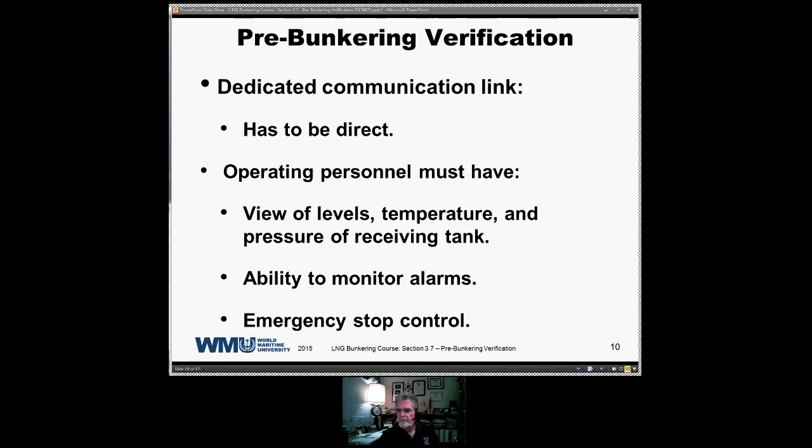...the operation down should any type of anomaly occur that puts the system in a potentially dangerous area. The dedicated communications link is usually a handy-talkie, a walkie-talkie, UHF, and it is required that they be intrinsically safe. An intrinsically safe item has special seals in it so that you're not going to get any vapors inside and run the risk of having a source of ignition. Even though you're talking very low powers, any source of ignition has to be eliminated. So the radios are made intrinsically safe, so it's not possible for any flammable vapor to get into the actual inner workings of your radio.

Emergency signals have to be clearly established and understood. Vessels have their emergency signals. Terminals have emergency signals. These signals should be discussed and clearly understood by the parties prior to any... Also, a vessel is going to have contingency plans. You're required to have this by the International Safety Management Code. Terminals are required to have a contingency plan. So it's important that all parties know what the other party is going to do in the event of an emergency.

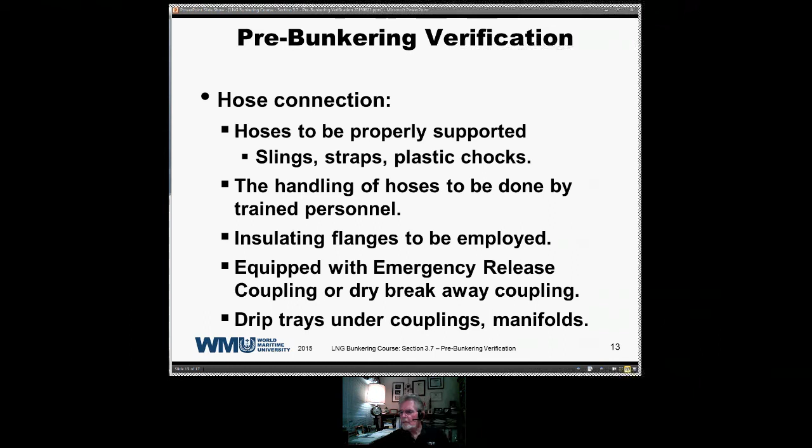We're going to go along here now. Insulating flanges, we got the drip trays, okay. Once all of these inspections are conducted, the declaration of inspection will be executed by the PIC, the person in charge from the receiving vessel or from the delivery vessel, and since it's bunkers, the PIC on board the receiving vessel will usually be the chief engineer. The declaration of inspection is also, the declaration of safety is also executed as above by the parties.

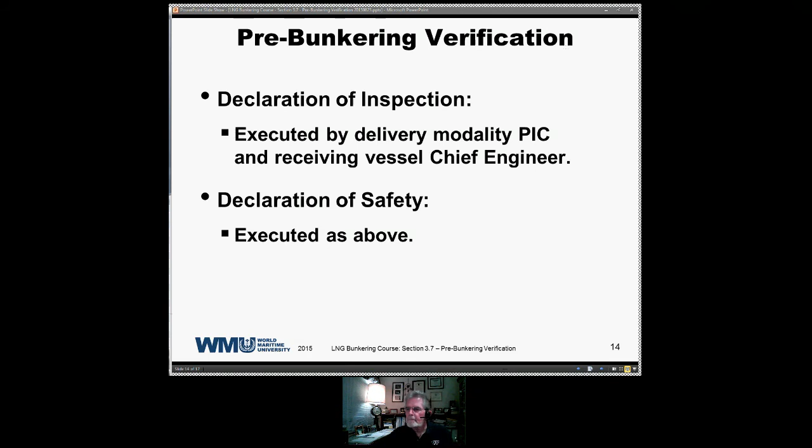The pre-bunkering verification is the first step to assure all operations are followed as prescribed so that there's no deviations and that they're monitored at all times. Once again, this can become a routine operation, and you really don't want to allow it to become routine. It should be approached by the parties involved with the attitude that this is the first time it's ever been done. So you're going to very, very closely take a look at the procedures as they're outlined and follow them step by step. And if these procedures are followed step by step, close attention paid to them, we're going to go through bunkering operations without any incident.

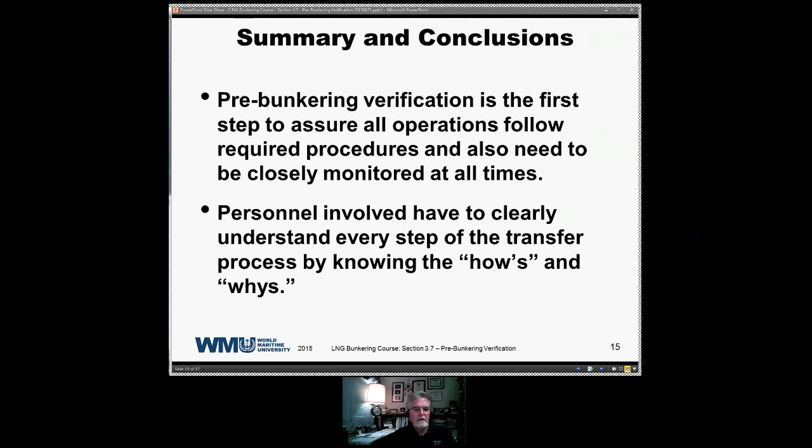The personnel should have a clear understanding of every step of the transfer process, knowing how to do things and why we're doing things. You just don't automatically assume something's on a checklist and it's just done. We have to do this because it's on a checklist. No, we're doing it because there's a reason. Everything on that checklist is there for a reason. And it's important that the operating person know why they're doing it. Again, communications equipment's tested.

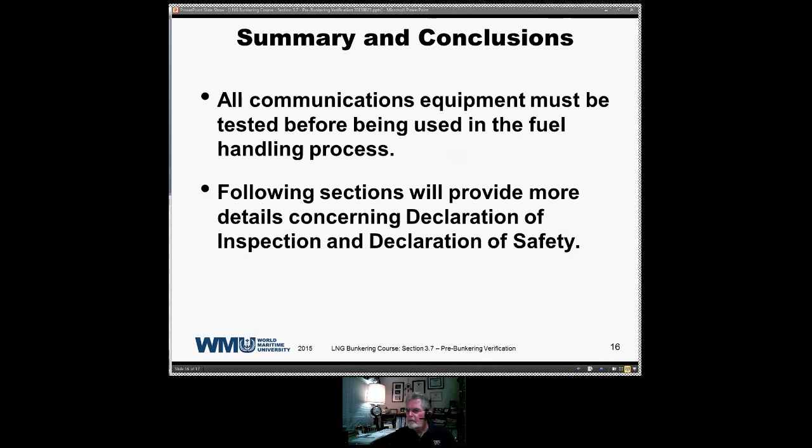And what we'll do now is I believe we're going to actually take a look at a declaration of inspection. Okay, all of this is fundamental, can often be taken for granted, but we always have to follow the saying: we're going to trust you, but we're also going to verify everything step by step. Okay, that takes care of that section. Move on to the next one, which is actually, I believe, the declaration of inspection. Okay, do we have any questions or thoughts on this particular portion of the course? All right, let me pull up our next PPT.

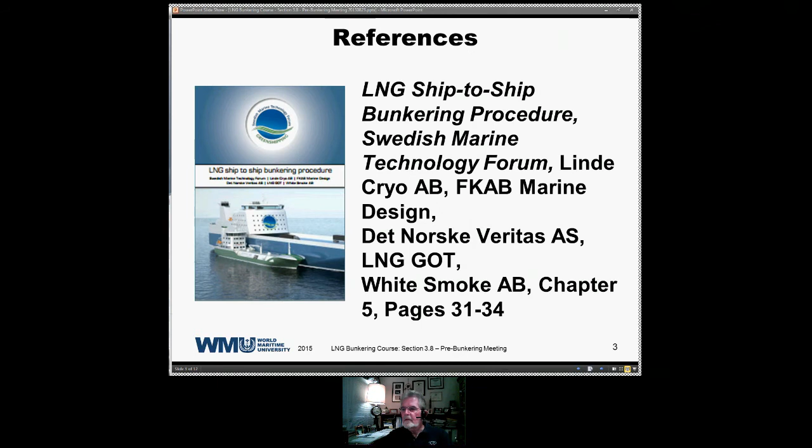So we're going to take a look at the pre-transfer checklist items and discussion items, and among some of the things that we talked about earlier, we're also going to take a look at the current and future weather conditions. We know what the weather is when the ship comes alongside, but we also want to know what's going to happen over the next several hours. You don't want to get caught in a sudden storm. Let's just say there's a series of violent thunderstorms that are going to be moving through an area, such as overseas. In Indonesia, we used to have what were called sumatras. It was a very strong wind that would suddenly come up without warning. So you wanted to be aware of what the weather is going to be.

Again, we're going to make sure the receiving ship is safely berthed. We're going to make sure that the delivery ship, if it's a barge or a small LNG ship, is also safely berthed. The mooring plan is something that's exchanged between the receiver and the deliverer prior to any operation, so that everybody knows where mooring lines are going to be placed. Both parties can take a look at the plan to make sure that the vessels are going to be safely secured to each other. Again, the fenders are properly positioned and properly secured, and the communications language has been agreed upon.

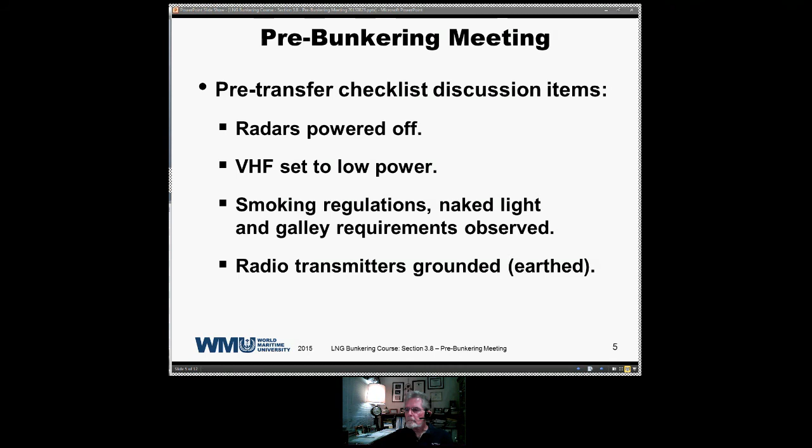We're going to agree upon emergency signals and shutdown procedures. Firefighting equipment, again, tested and ready for use, and that's all parties involved. And that the navigational bunker signals, which are required by international regulations, are properly displayed. And again, an overlap, the bunkering hoses are inspected and tested.

If there's any bunker manifold that's not being used, we have to be certain that there's a blind flange installed on that manifold. A blind flange is a full face flange, full face cover, no openings or holes in it, and that has to be properly secured to any manifolds that are not in use. The alignment of the valves in your bunkering system have to be correctly positioned and checked prior to the transfer and during the transfer.

Once gauging is completed, the quantity to be transferred is agreed upon. And during this process also, we're going to agree upon what the maximum pumping rate is going to be. For the bunkering operation, we're not talking huge quantities of LNG to be transferred. One of the examples yesterday was the ferry boat where the capacity of the tank was 65 cubic meters. So the maximum pump rate in a bunker transfer situation like that is going to be relatively low.

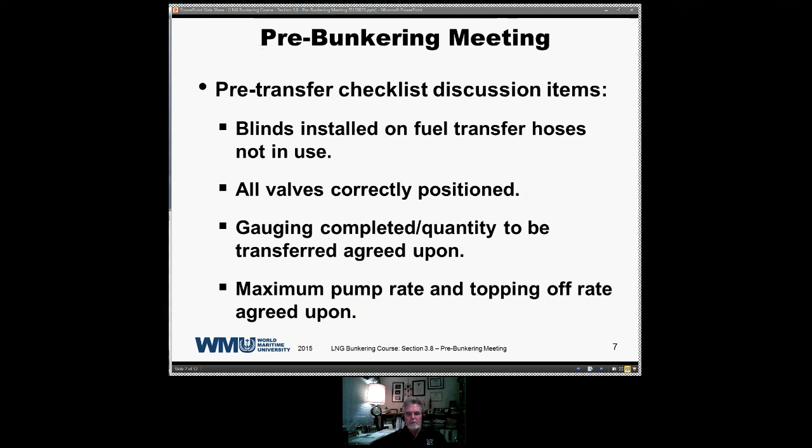A topping off rate: as you approach your tanks being filled, you reduce the transfer rate. You don't want to be pumping at maximum rate as you're coming up to the highest level inside of the tank. There's a lot of turbulence and movement of the liquid within the tank, and you don't want to run the risk of having an emergency shutdown because liquid has splashed up, say, to a high-level sensor or something like that. So as you approach the full level of the tank, you reduce the transfer rate and you bring that level up to full capacity at a very, very slow rate. And that rate you're going to agree with your deliverer prior to actual transfer.

The bunker station is always going to be manned by trained personnel. You're not going to leave the second cook in charge of bunkering. Not that I'm picking on cooks, just that the people who are involved in the bunkering operation have to be fully trained. They have to have a knowledge of liquefied natural gas, its properties, characteristics, and everything that you are being exposed to in this course. Personnel have to have a knowledge of the location of the emergency stops and how to properly use them.

Again, we're going to look at drip trays positioned below liquid manifolds and connections, and a vapor return connection is going to be made. This is not necessarily true in all cases. It's going to depend upon the delivery modality and the type of tank that you have on board your receiving vessel. So in some cases, you will have vapor return. Other cases, there won't be vapor return. And this is something that will be determined again by the type of vessel.

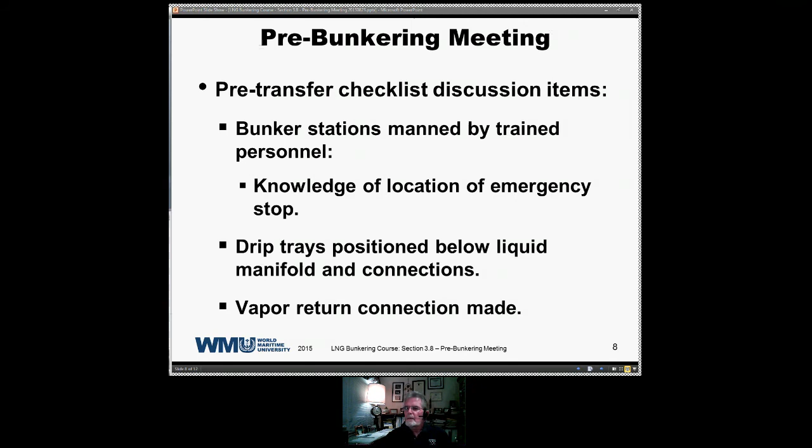If by any chance your marine gas oil or marine diesel oil is also going to be transferred, you can have what are called SIMOPS, simultaneous operations. SIMOPS includes cargo operations while LNG bunkers are being transferred, and it also can involve the transfer of other types of fuels. As I said, all of these diesel engines in vessels nowadays have the ability to dual fire. Some of them are tri-fired. You can fire 3 different types of fuels.

So in some cases, you will be also transferring your marine diesel oil, your low sulfur diesel, or perhaps a higher sulfur content fuel for use when the vessels are outside of your emission control areas. So you can have these operations taking place simultaneously. If you're transferring the marine gas oil or marine diesel oil, it's important that the deck scuppers are plugged. Your deck scuppers, again, for non-marine people, these are the deck drains. It's a drain hole that's located in various areas throughout the deck.

And when you're transferring an oil product, you have to have these things plugged so that if there is a spill, you don't get any oil into the water, because these drains, they drain directly over to the side; they go down in an internal tank, and eventually they go over the side of the ship directly into the sea. Your sea and overboard discharge valves have to be closed, lashed, tested, and checked, made sure that they are lashed. Any of these overboards that's not in use.

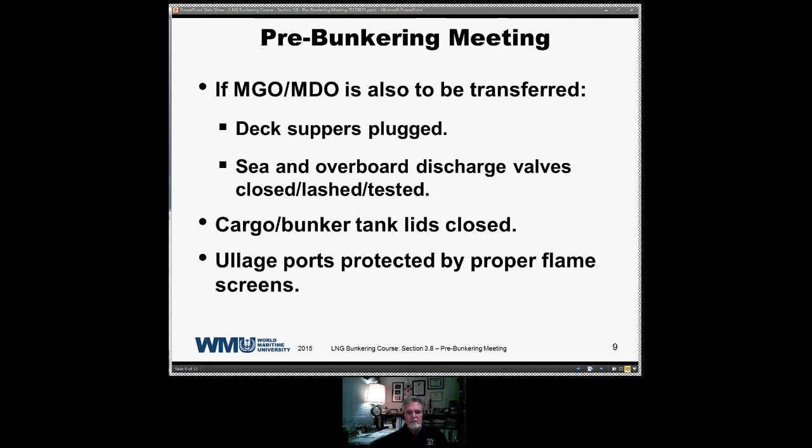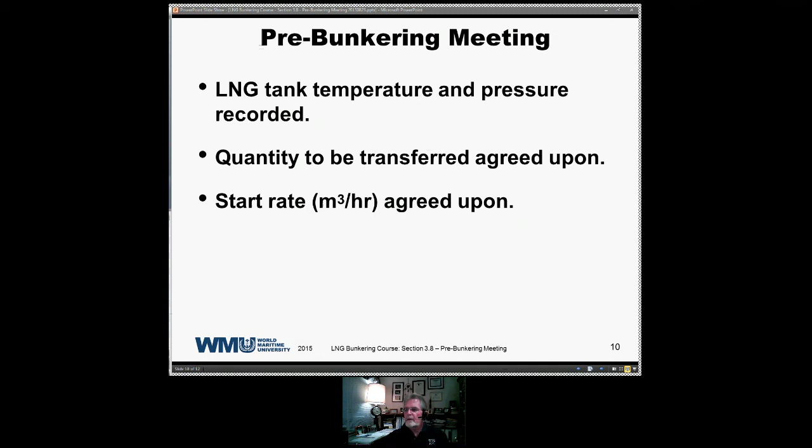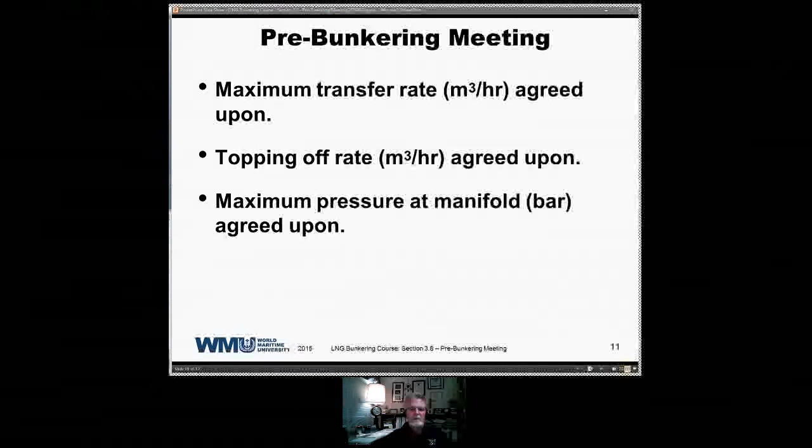Again, the recording of temperatures and pressures, quantity transferred to be agreed upon, and the starting rate; also maximum transfer rate is agreed upon, topping off rate, and maximum pressure at the manifold is agreed. All of these items are of critical importance, have to be agreed upon by both parties. Just don't willy-nilly start an operation and say, well, let's see where we're going to wind up with pressure at the manifold. No, we have to know what it's going to be beforehand, and then it has to be monitored during the operation to make sure that we do what we said we are going to do.

The pre-bunkering meeting process is critical to assure that nothing can or will go wrong. And believe me, as best you try, sometimes things do go wrong, even though you agree. So this isn't a guarantee, but it does prevent most cases of disagreement or issue. Some of the items to be discussed are obvious, but the key is that all parties at the pre-bunkering meeting clearly understand the process. If there's any doubt or uncertainty, ask questions. Again, we're going to trust, but we're going to verify at all stages of the operation.

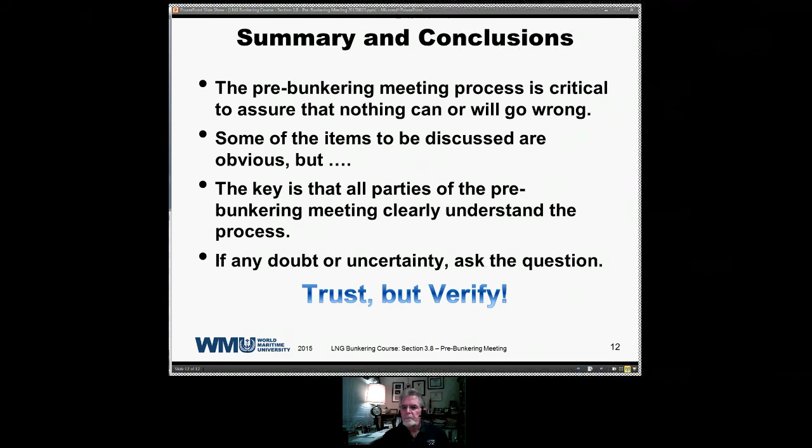Okay. Some big differences in discussion about the LNG. Okay, excellent question, and you're absolutely right, Simon. Simon has asked me, during bunkering of heavy fuel oil, often big differences are discovered, and there often is a discussion about the amount of cargo. What about LNG? Outstanding question. I appreciate that one. Bunkering operations are notorious, absolutely notorious for differences, and that's why we were talking yesterday about this custody transfer gauging system on board the LNG carrier, and also the gauging of the delivery vessel.

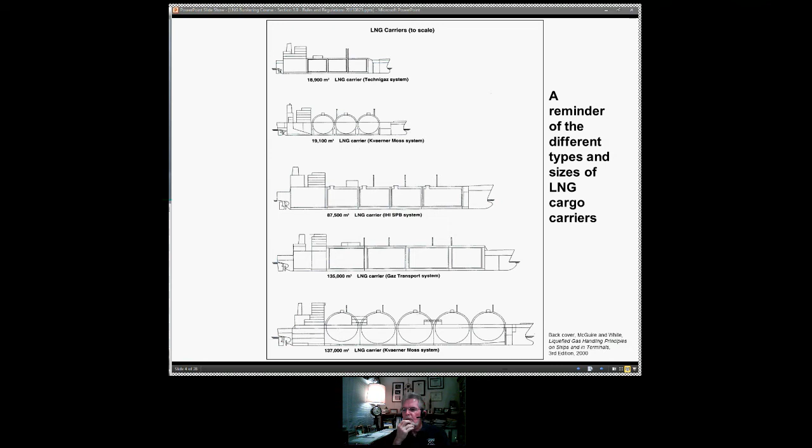Flag state maintains a register. We're going to go through this fairly quickly because it's basically just for information purposes. They assume jurisdiction under its national law. National and international laws ensure the safety of the vessel. Vessel surveys are conducted and ensure qualifications. This is the responsibility of the flag.

Hopefully, under IMO, the playing field has been evened out greatly over the last 30 years. So you don't have these vast differences that we had years ago between registries. Ship operators, some of them maybe not as scrupulous as others, would all go to a flag state that maybe wasn't as attentive to safety regulations and whatnot.

With the introduction primarily of the safety management code, and with the responsibility of the maintenance and operation of ships shared by the management people, we have seen a lot of these differences greatly reduced. Most of your flag states are very, very well respected in society. This perhaps wasn't as much the case 30 years ago.

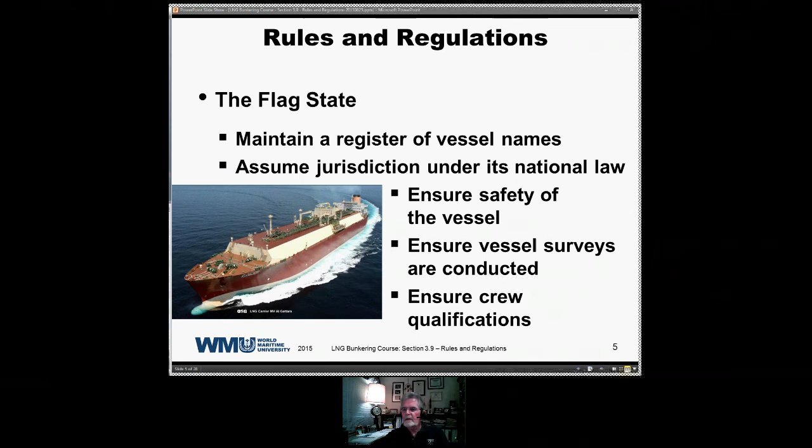Various rulemaking bodies, such as the IMO, the International Maritime Organization, and under their auspices, the International Gas Code. And the International Gas Code would be responsible for the bunker barges and bunker ships. The IMO also has the IGF Code for ships fueled by LNG, and that's going to have the rules and regulations for the construction of the receiving ship only.

The vessel that's going to be burning LNG as a fuel, those rules will be established by the IGF. Again, it's for construction only; the actual operation is another issue. You have the society, SIGTTO, and OCIMF. These are two private organizations.

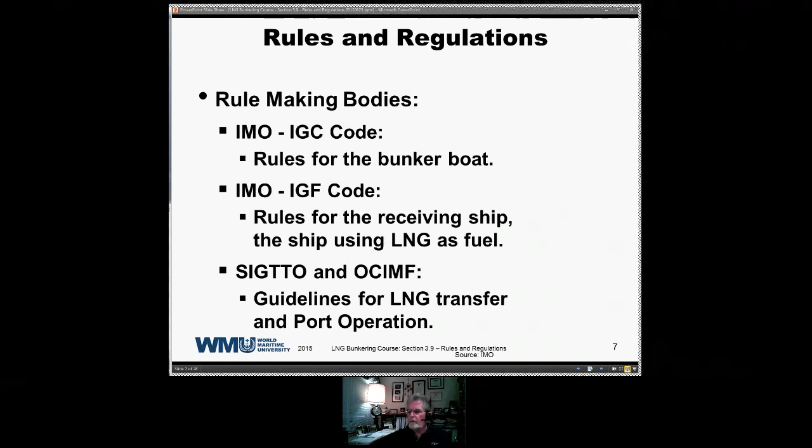We also have various port regulations, as we mentioned yesterday. We have Antwerp, Rotterdam, Singapore. All of these ports are going to have their own rules and regulations, and in most cases, those regulations are consistent with international rules, but because they do have the authority, they can establish rules that might be unique to these ports. So it's important that the ship operators and the ship staff have copies of the rules of the various ports they're going to be visiting. This way, you're not caught short.

Then you have various onshore regulatory bodies, rules established by the EU, by the National Fire Code here in the United States, rules established by FERC, which is the Federal Energy Regulatory Commission. All of these agencies issue regulations on a regular basis.

In most cases they're published in advance, with notice given to people to stay on top of. But like all regulatory agencies, rules are promulgated and changed. So as you can see, there's a myriad of groups that establish rules for the transfer of LNG, for the control of LNG operations.

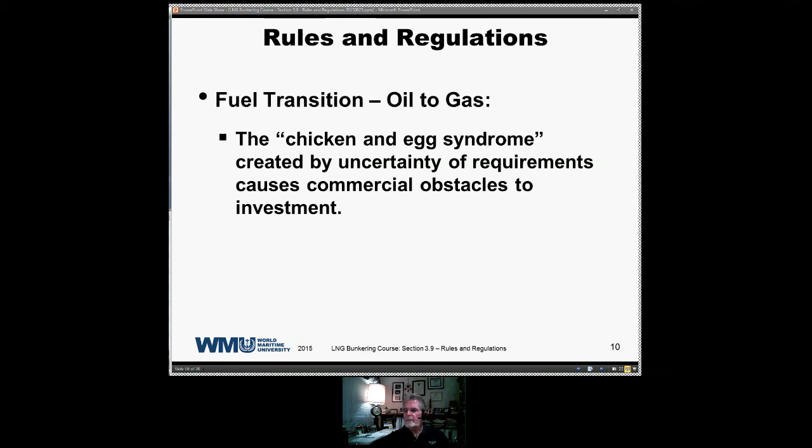With the development of a consistent international framework, entities can make investment decisions. Again, am I going to have a market? Am I going to invest billions and billions of euros, billions and billions of dollars into an infrastructure, and then nobody's going to use it? It will happen. Investors are going to be attracted to this as we go along. Once they see that there's the opportunity to make some money, they will jump in, and we're going to see it grow.

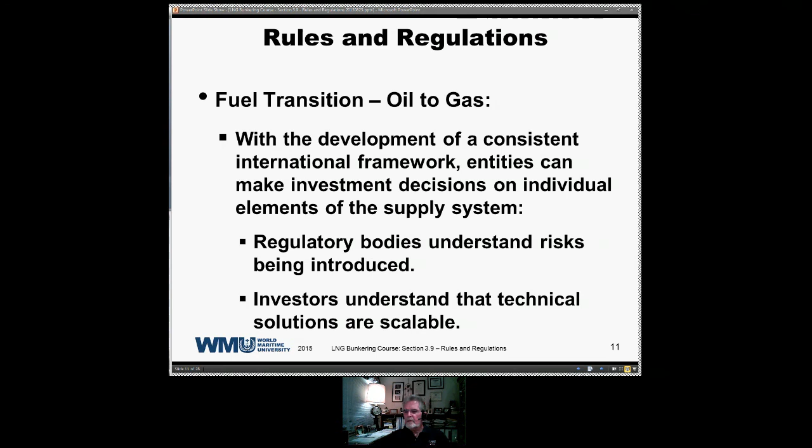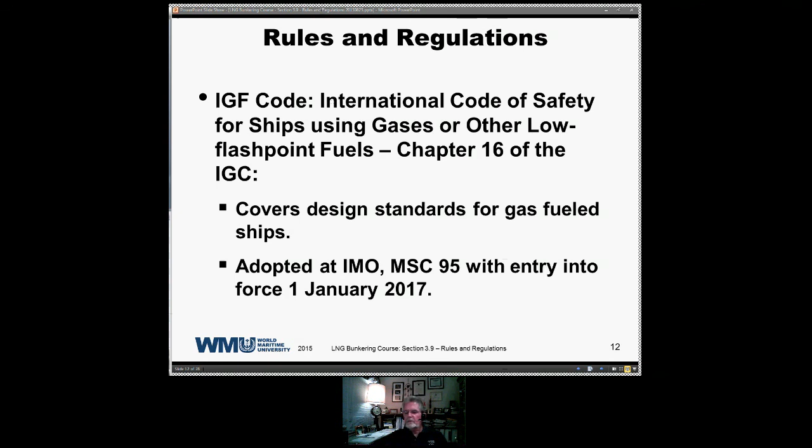The IGF Code is the International Code of Safety for Ships Using Gases or Other Low-Flashpoint Fuels. It covers the design standards for gas ships. It was adopted by the IMO and entered into force January 2017. It does not cover crew training requirements or the bunkering interface, and it does not address port-specific operational procedures. Again, it's for the construction of vessels that are going to be using gas.

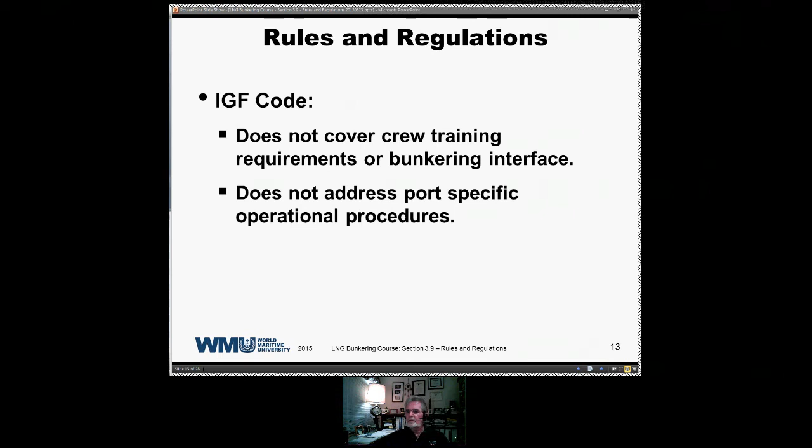So it's unlike when I entered this industry many, many years ago, when an officer left the ship for vacation, he was on vacation. He didn't have to do anything. He just waited until his vacation was over and then went back to work. Nowadays, when an officer goes on vacation, chances are he's going to be spending several weeks of his vacation going to school, either being trained or retrained to meet STCW requirements.

Training requirements are ongoing. Training requirements are always increasing. They're never going to be less. They're always going to increase. So the STCW covers training requirements for officers and crew on gas-fueled ships. They cover training requirements for all ships, not just gas. Adopted at the IMO and entered into force again in 2017. But they do not have training requirements for shore-based personnel. Shore-based personnel, I don't know what their requirements are.

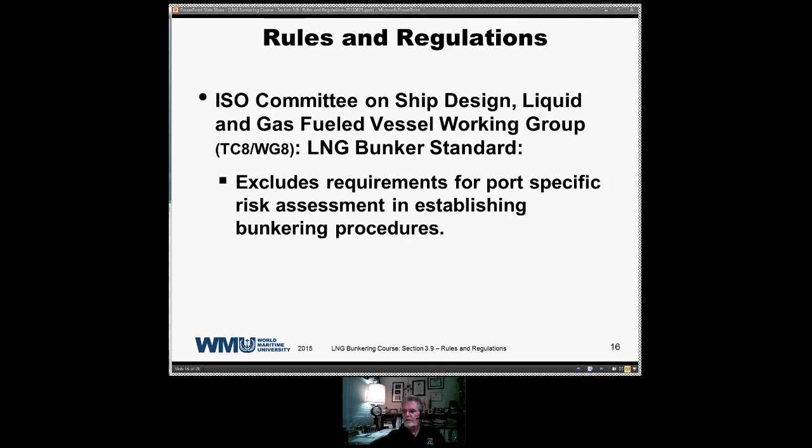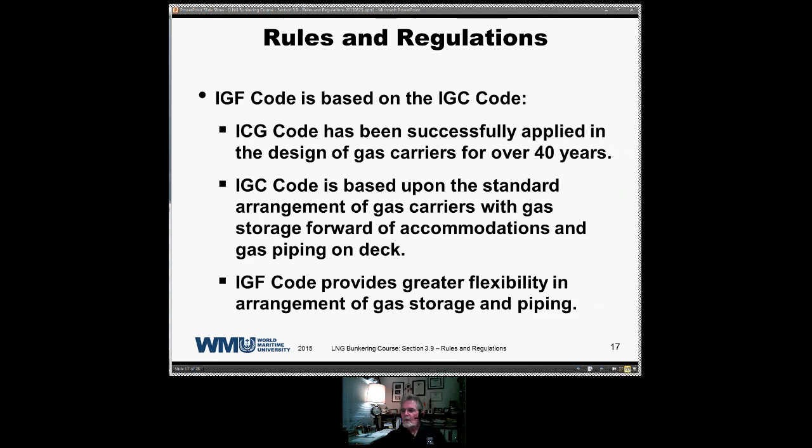The routing of fuel piping: the gas code limits cargo gas used as fuel to piping in the machinery spaces. And the fuel code allows for runs of gas fuel piping in other areas of the ship, provided they are protected by double wall pipe or ventilated ducting. Anywhere you have gas passing through a space, it either has to be a double wall pipe, or you have to have excellent ventilation.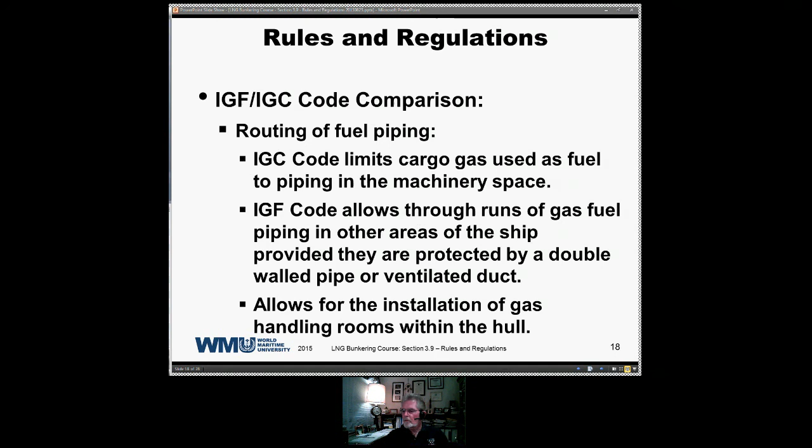The requirements will be established for a space, how many air changes have to take place in a minute, and that space has to have fans that provide the capacity. So you're not going to find yourself in a situation where you can have a buildup of explosive vapor should there be a leak. And the gas code allows for the installation of gas handling rooms within the hull. That would be your bunkering station. It's going to be a space actually within the hull.

If you have a tank, that tank takes up a large amount of space. So as a consequence, you can require up to 3 times the volume of space to get the equivalent amount of fuel. This is an economic trade-off. It's been studied, and it's still economically feasible, even though you're losing this space. Any space on board a ship has value. If you can put cargo into it, it has value.

So if you're using space for nothing but the area around a Type C fuel tank, this space isn't earning any money. But even though it's not earning any money, it's still cost effective to make these conversions over to LNG as a fuel. Okay, so we see a decrease in revenue volume of the ship, particularly for transoceanic. Again, it's been well thought out, well laid out. We see this trend now going to LNG as fuel on large container ships. So it's worthwhile. There's no question about it.

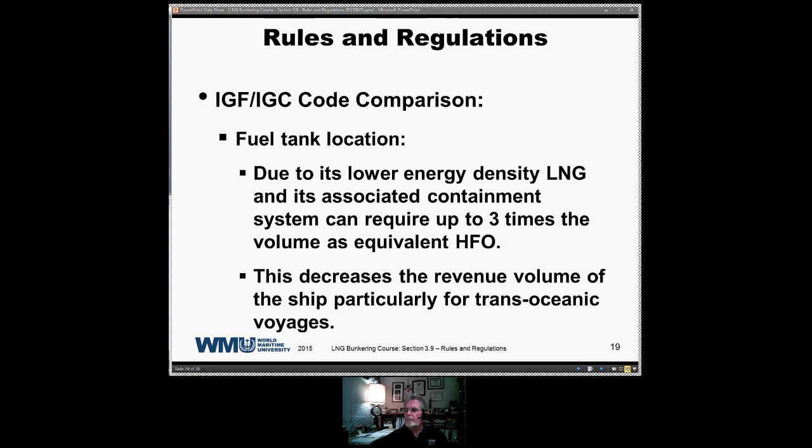The gas code, let's see, we're going to compare the gas code for fuel, gas code for vessels. ESD protected engine room. The gas code requires that all gas-fuel pipe in the machinery space be protected by double-walled ventilated piping. Okay. Again, you just can't run a pipe into the engine space of the vessel. It has to be double-walled. It has to be ventilated.

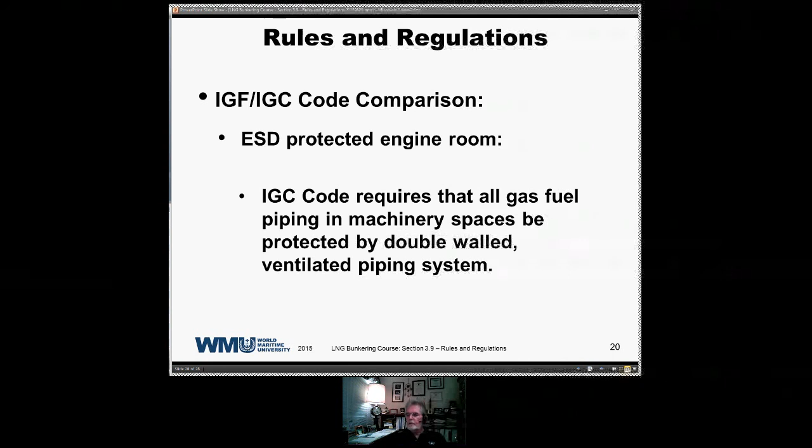You have to have the ability to have gas detection in this double-walled system, so that should there be a failure, you're going to generate an alarm. You'll generate a shutdown, so that you keep your vessel in a safe position.

The installation of this system, for some reason, is difficult with small engines, and I'm not quite sure why this is an issue. I haven't been involved in the actual conversion of vessels to dual-fired fuel. But anyway, the International Gas Code for Fuel permits the elimination of the double-wall protection if the ignition sources are limited and electrical power secured in the event gas is detected in the machinery space.

This could very well be because of the short distances involved, oftentimes, in where the gas source is located with respect to the engine. I suspect that the way this is established, it's still a very, very safe system. I'm not particularly crazy about it. I'm certainly in favor of double walling anytime that you have gas going into a machinery area or going through an internal space of the vessel.

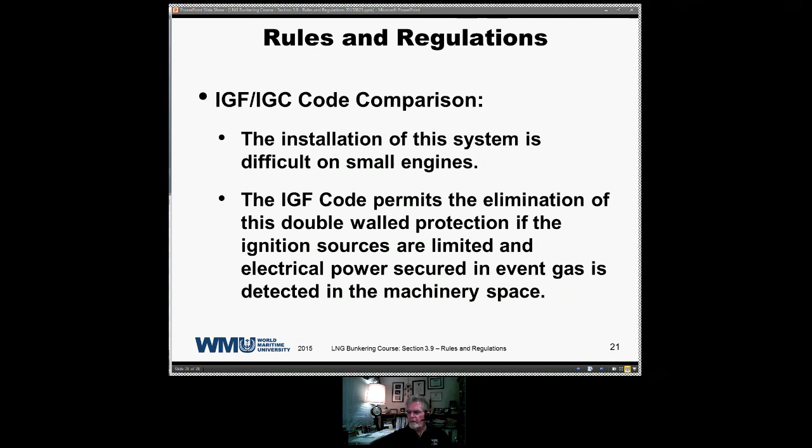This is something obviously that's going to be closely watched as we go along, and the idea of limiting electrical power, securing it in the event of a gas leak, is something that I'm not quite sure about.

Operational methane venting. Methane is a greenhouse gas and has a potential of 30 times that of CO2. So we're not going to be dumping methane into the environment. We're going to have to minimize methane release as part of the bunkering process, and we saw how that is accomplished yesterday with the dry break couplings, where the amount of LNG is minimized, and it can be eliminated totally by taking some extra steps.

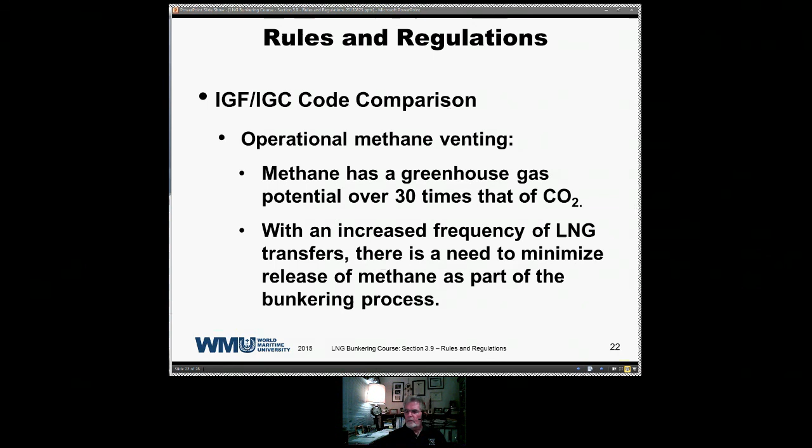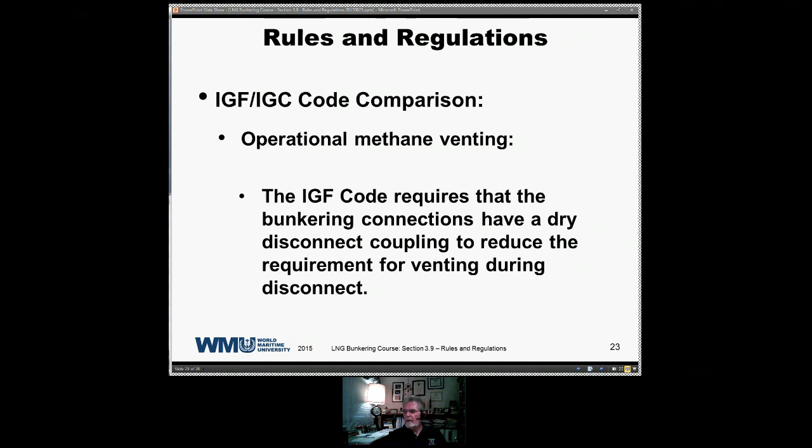We're going to go through that when we talk about the transfer process of LNG, because with all of these hoses, even though we're using these dry break couplings, we can add an additional step into the operation where the hose is actually inerted with nitrogen, so that when that dry break coupling is released, you're not releasing any methane into the environment. Again, the gas code requires the dry break couplings to reduce the requirement for venting during the disconnect.

Crew training requirements, again, we'll return to that, for gas-fueled ships are based upon regulations contained in the STCW regulations. Key performance indicators, KPIs, have been edited to delete topics required for the carriage of gas cargo.

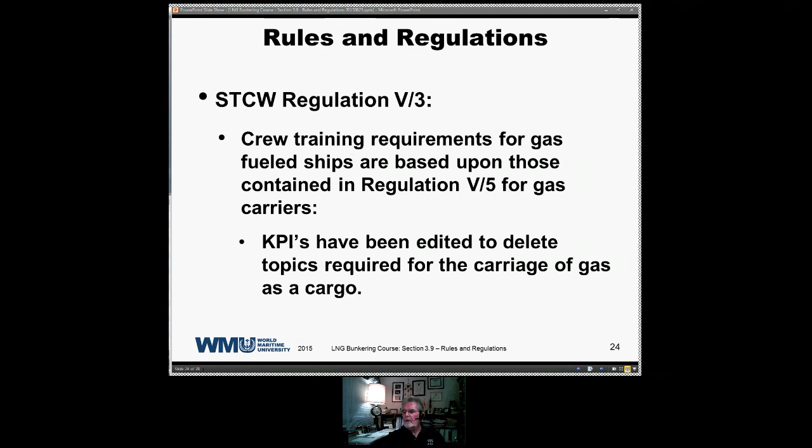I'm sorry about that. It's anticipated that the crews of LNG bunkering vessels will comply with the training requirements for gas carriers. This is important. This is part of what you're doing for those folks who may be involved in bunkering operations in the future. The LNG fundamentals course, I know in the U.S. and in most places, is a minimum 2-week course, just to deal with the science and physics of LNG and the carriage of LNG on LNG vessels. So we're trying to cram an awful lot of information here into a very, very short period of time.

But the people involved in the bunkering operations are going to have a fairly good working knowledge of LNG, and the training requirements for the people on gas-fueled vessels are going to very much parallel those for people on gas carriers. If you can get a copy of the DNV regulations, Det Norske Veritas Class Society, they break down the training requirements they want to see implemented for vessels that they class into three sections, going from the people least likely to be involved in the bunkering operation up through the people who are directly involved.

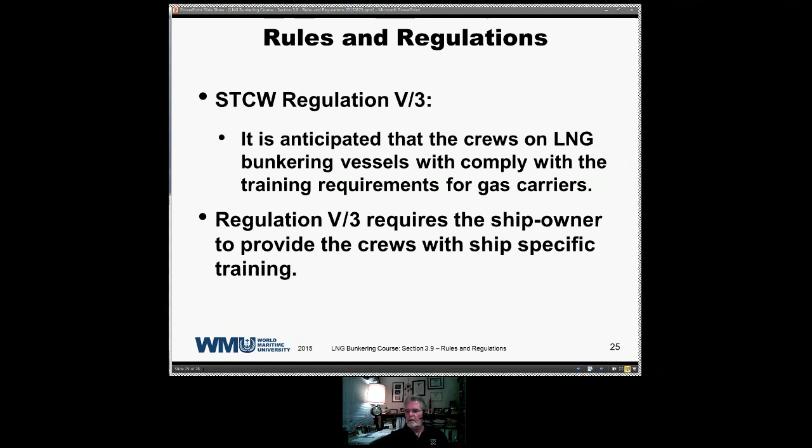Okay, in the LNG cargo transfer, the ship-shore interface is determined by best industry practice established by the major LNG terminal operators. This was established by SIGTTO over a period of years, and best industry practices have been adapted and integrated into international regulation. Many of the regulations that we see on an international platform have been established by best industry practice. Seeing that these practices do work and that they do provide a high degree of safety, they were codified

and became regulation. Due to the regional nature of LNG bunkering, there's a need for a global standard to ensure compatibility of connections and procedures. And this is the evolving part of this operation. The presentation that we've put together here, you may get the impression it jumps around from one thing to another. Well, this is different, but how come this is different? Why is this? Because we haven't come up with standards. And that's something that I'm certain the IMO is going to be working on as we proceed in this conversion from oil to gas. We will see a narrowing of the different standards as we go along.

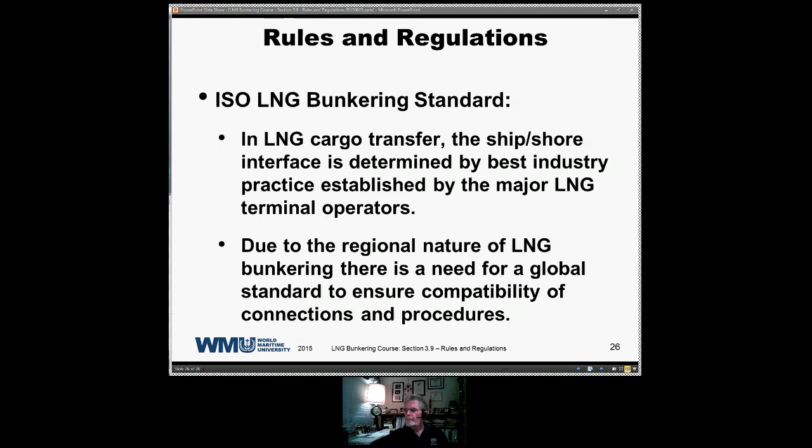So the LNG rules and regulations stem from different national and international jurisdictions. Flag states have considerable influence on their own maritime areas, and at the same time, the IMO and its existing and emerging codes have global influence. LNG vessel operators need to know which is which and when. Okay? Again, we are going to come to a meeting of the minds over the next several years. It's going to take a degree of patience and tolerance as we go along, until these variations that we're running now are totally eliminated.

There will be a standard. Eventually, there will be an international, worldwide standard, so that if you go to Houston, you're pretty much going to be doing the same thing that you're doing in Singapore, maybe with the exception of some local port regulations that might be a little bit different. But it's going to take time, and it's going to take a lot of patience on the part of the parties who are involved in this. So in any event, I do believe that concludes this section. Yes, it does.

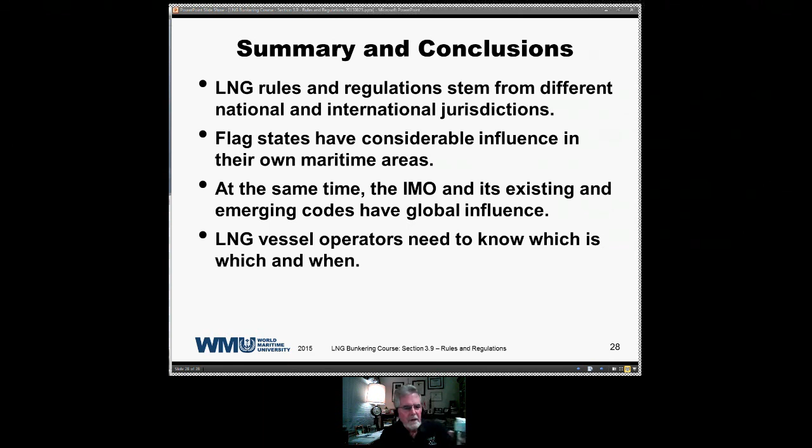And now that I probably have you terribly confused, are there any questions that we have this morning? What do you think we got?

Excellent question, Kelvin. This is an issue that, my understanding, he has. Methane has 30 times the greenhouse value of CO2. So he asks, what do I think or say regarding the dangers of gas flaring, as is often the case in crude oil production locations? Nigeria, he's using as an example. Unfortunately, this is a reality of life. It's going to be totally dependent upon each individual country how they're going to deal with greenhouse. Some countries obviously have been very, very aggressive, and as a consequence, major oil companies have had to reduce flaring. In many, many cases, they have not only reduced it, but have virtually eliminated it.

Depending upon where we go in the world, you're going to see these various differences in flaring. Obviously, there's an economic value to everything that gets flared. And I think as countries see this, and as the oil companies see this, they will make continued efforts to recover as much as possible and minimize flaring. It's unfortunate that some countries are in a position where perhaps they feel that they have to allow the emission standards not to be as stringent as they should be to keep these operations within the boundaries of their country. There's just so many different things that enter into it.